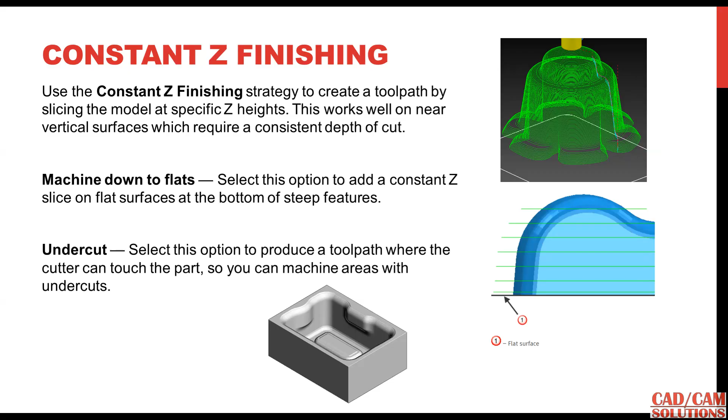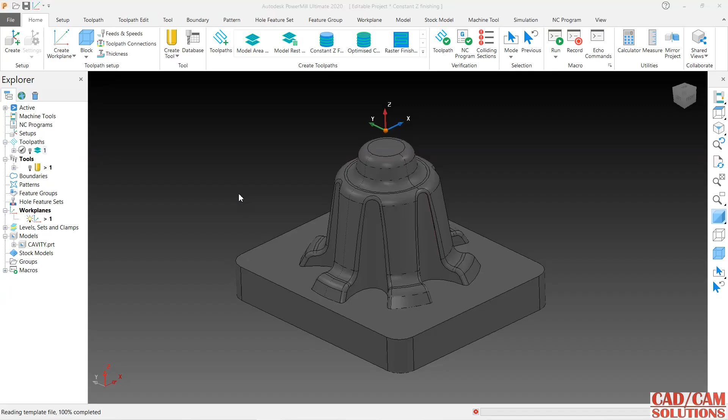This is my model, and here I have already done the roughing operation. Let me hide it. Now I want to do constant Z finishing, so click it, and first I'm going to define a tool. Click here for tool, and I'm going to use a ball mill with 16 diameter.

Now, constant Z finishing can be created in two ways. If you have multiple pockets or multiple bosses, we can use this region option, which will finish the first region completely before moving to the next one. With level, it will cut the first level on both regions, then move to the first one and then the second, so it will be level based, as we discussed in model area clearance.

So we are going to keep this as region, and my tolerance is 30 micron, and thickness is 0 because I want to finish it. The step over is 1, and I'm going to change it to 0.5. Let's generate it.

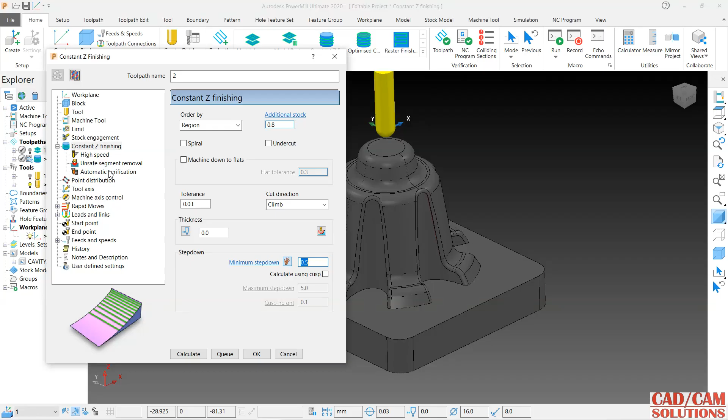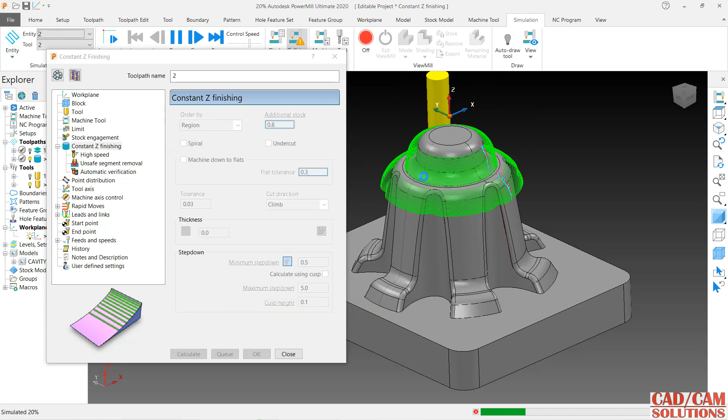Okay, so this will come, and just verify it. I want to verify the second one. The constant Z is going to create a toolpath over the vertical or near vertical edge, on the vertical faces it is creating this tool path. If there is a flat surface, it is not creating.

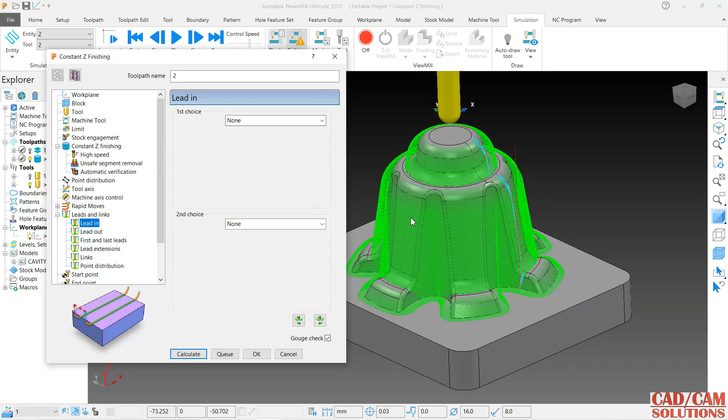Add it, and here the link scheme and lead in lead out if you want to add, but here it is skim. The links are skim, and Z level profiling. If you want to cut this undercut, for that undercut I am going to open a new model, so just wait.

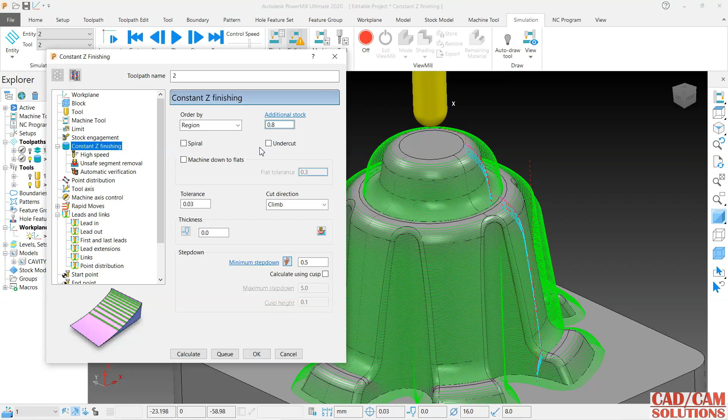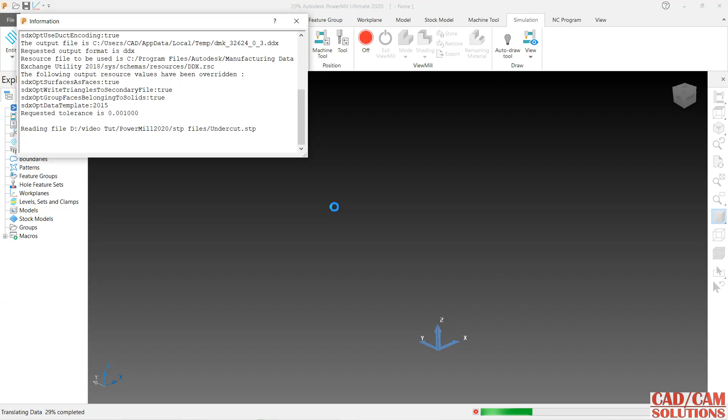Okay, and just save it. So my next model, I'm importing the undercut model. This is the model.

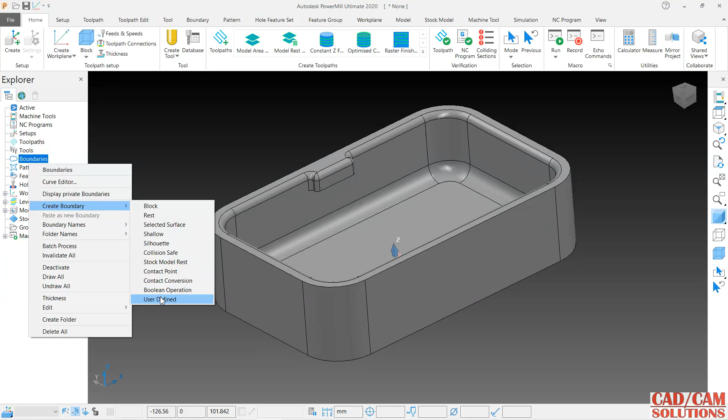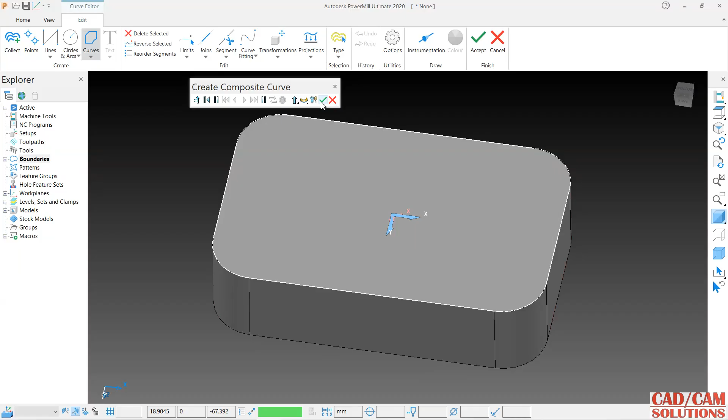Here first create a block. The size is not proper, so how to create the block for this? First of all, I'm going to create a boundary. So create a boundary, user defined, with composite curve, and click over this edge. So this is my boundary. I want to create my stock as per this boundary, and we have already covered all the options available in the block. So this is the boundary, and the thickness is 25.

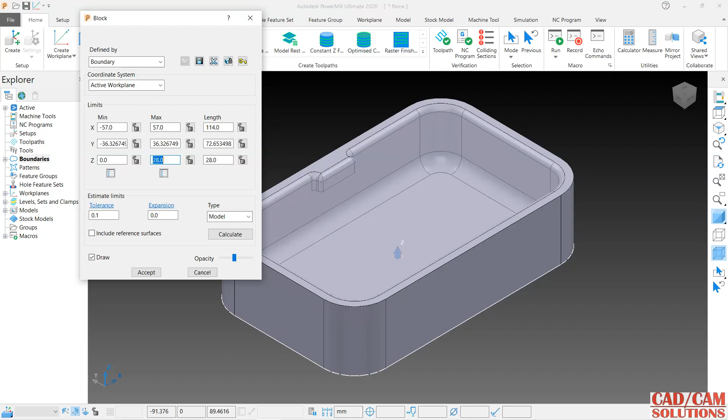No, it is 28. Now I'm going to define the tool, and my tool is 8.0, 45 is the length. I want to add the holder. Close.

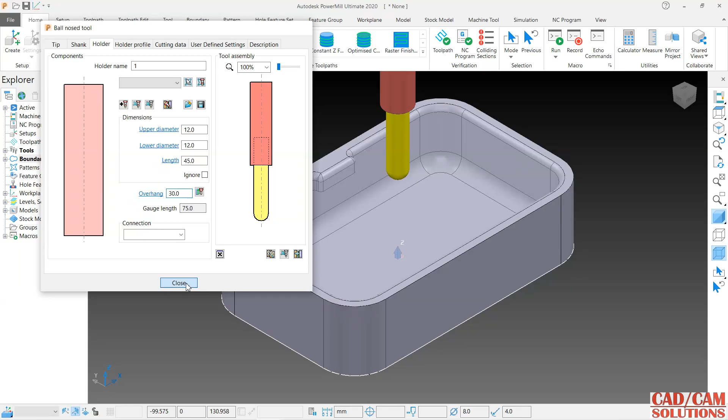Now directly I'm using this finishing operation, but first we have to create the roughing operation and semi finish operation, and then this finish operation. For training purposes, I'm directly using this constant Z finishing with undercut.

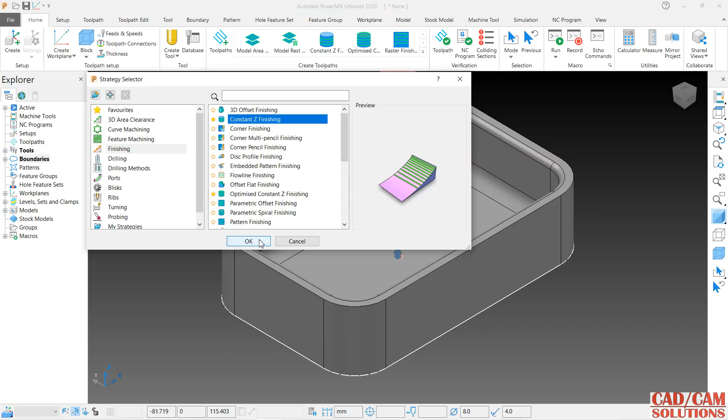Click here, and this is region based, and 30 micron tolerance, rest of the options are the same, just calculate it and see.

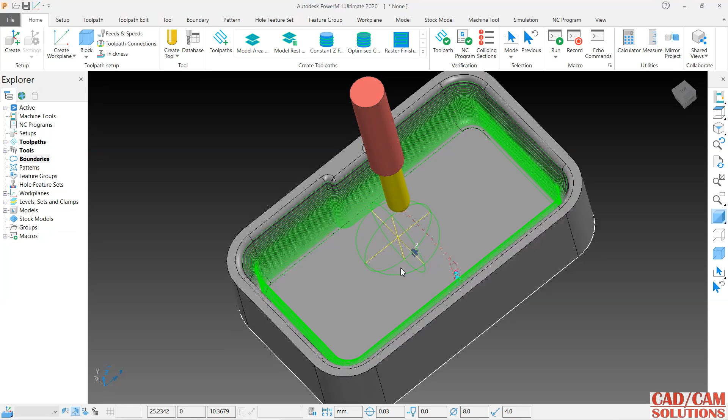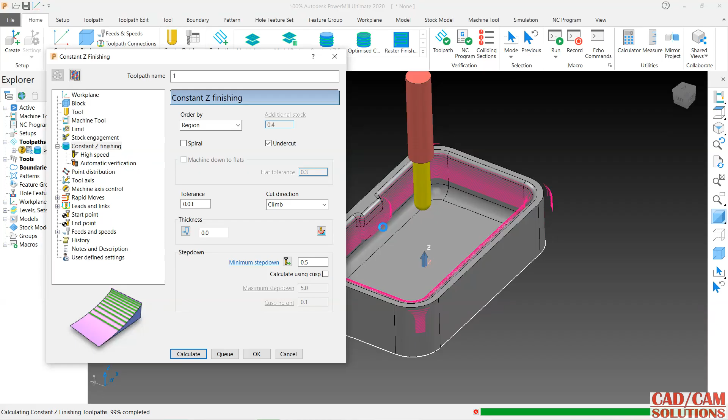Here it is creating the toolpath, but it is skipping this undercut area. If I am going to add this undercut area, it will not create it because of the tool. The tool will not go under this area, so we have to change the tool. It is going to skip it, so remove it.

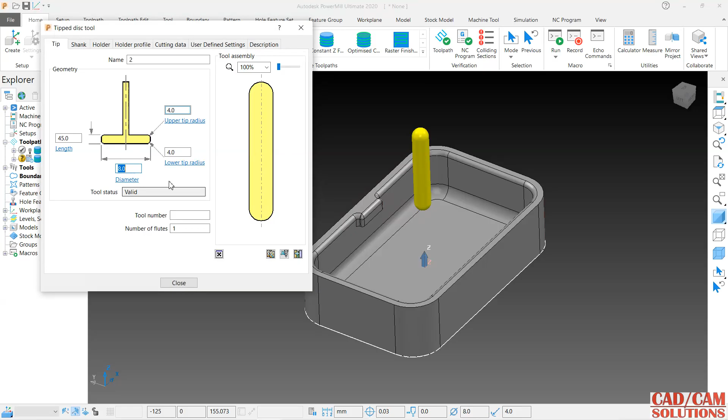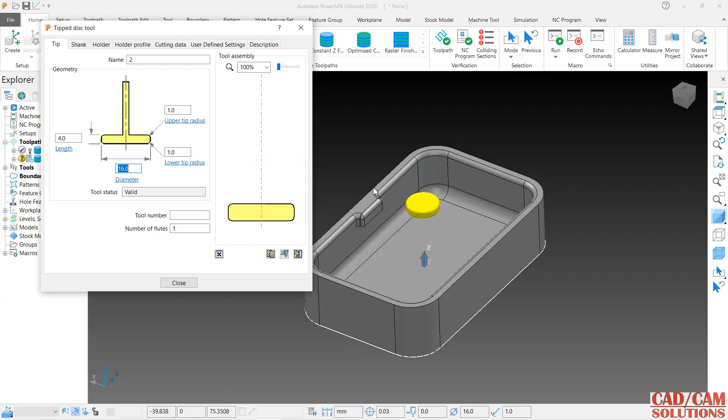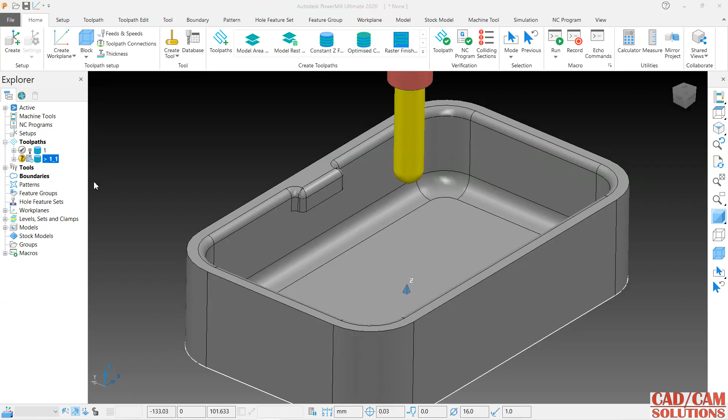So this is my tool. Now I'm going to create the same option with this. This is my tool, click here and define the tool. This is my tool, and here I want to use this undercut, and the rest of the options are the same. Just calculate and let's see the result, whether it is cutting the undercut area or not.

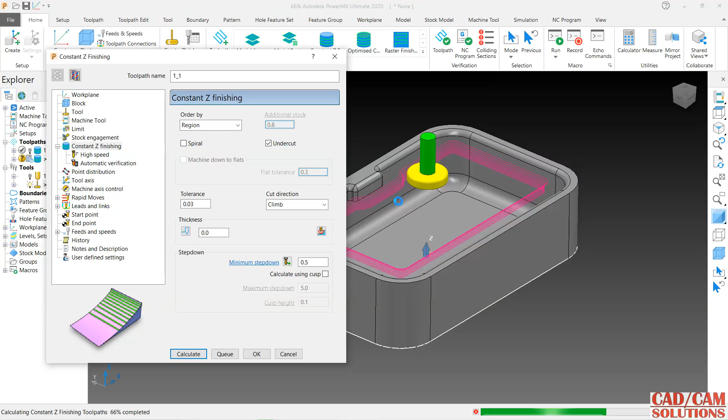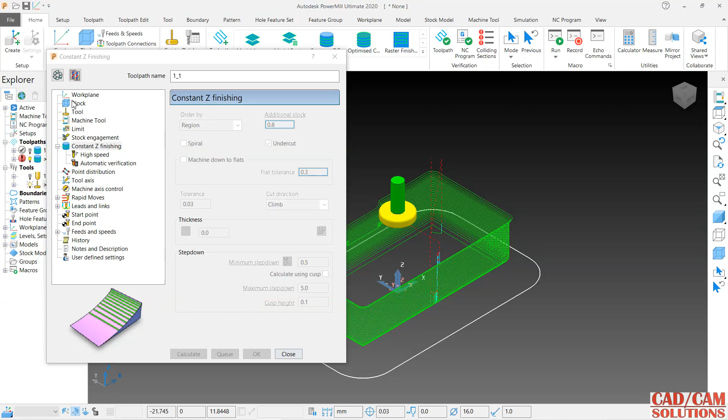I did it. Now see. And if you want to simulate it, just select this and simulate. Now it is going under the undercut area.